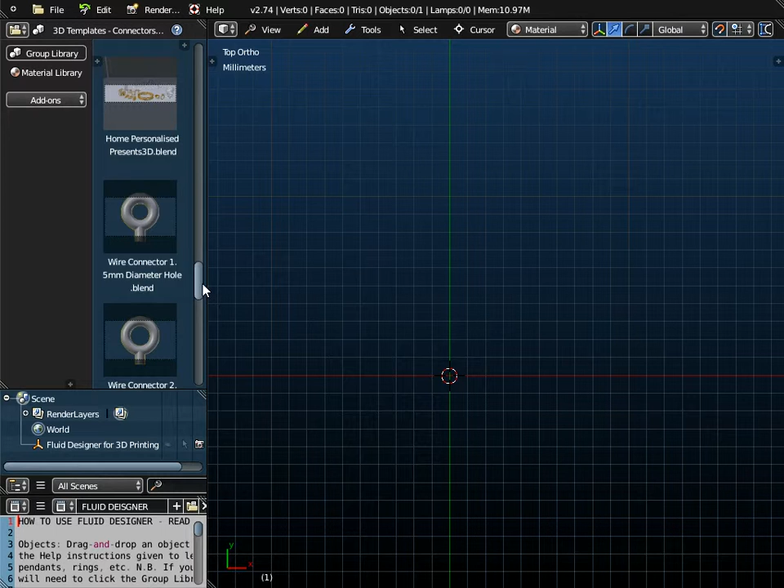We're going to use a number of objects. First object we're going to use is in 3D templates connectors. We're going to use this wire connector with a 1.5mm diameter hole, that's for the fish hook to go through.

I'm going to use a Harrington font. In this case, I'm going to use Harrington font letter A, so that's in the alphabet Harrington fonts folder. I'm just clicking group library there to refresh this file list.

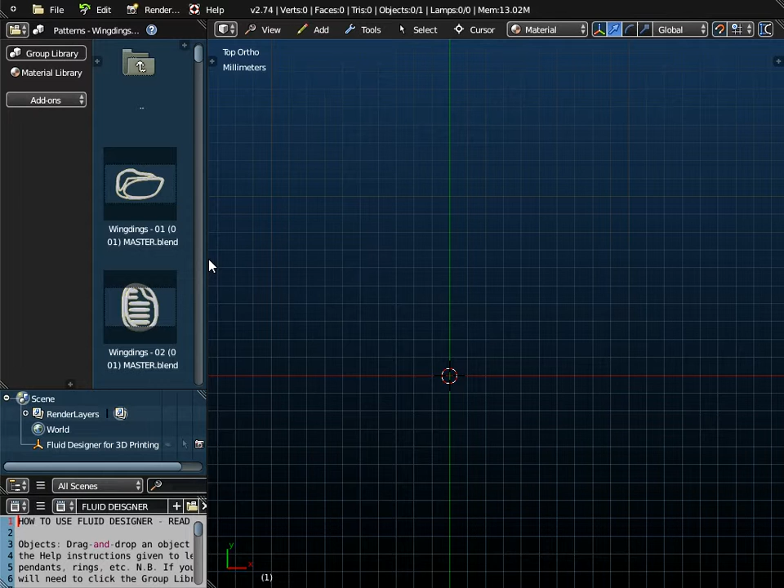Now, there are some Wingdings patterns 1 and 2, as per the special symbols that appear on your keyboard in Windows, and I'm going to use Wingdings 08, this mouse. But as you can see there are lots of other Wingdings patterns available as well, and they all work in the same way.

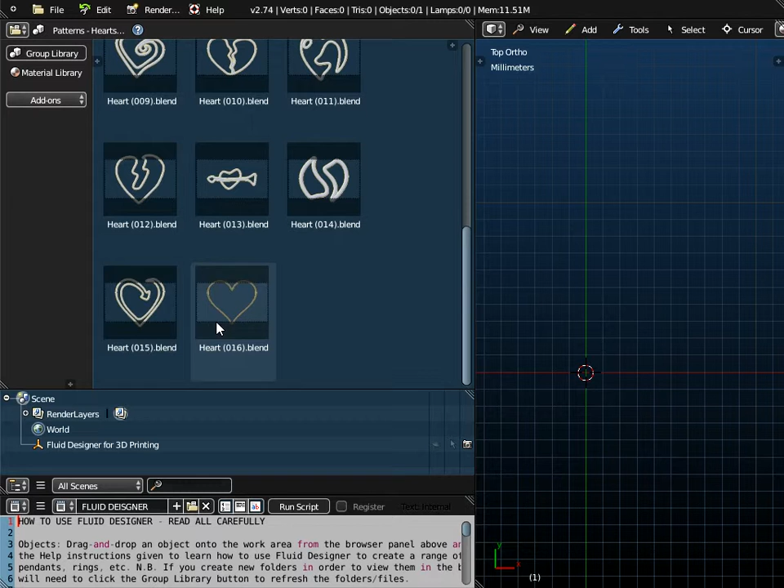And I'm going to add those various items to a heart pattern. As you can see in this folder here, the hearts patterns folder, there are a number of different hearts that I can use. I'm going to use heart 015, but I could of course use any of the others. So I'm just going to drag and drop that object onto the workspace.

I'll just switch on screencast keys, so key presses I make should be displayed down here, and just open up the properties panel here. The thickness of this object at the moment is 1mm by 2mm deep.

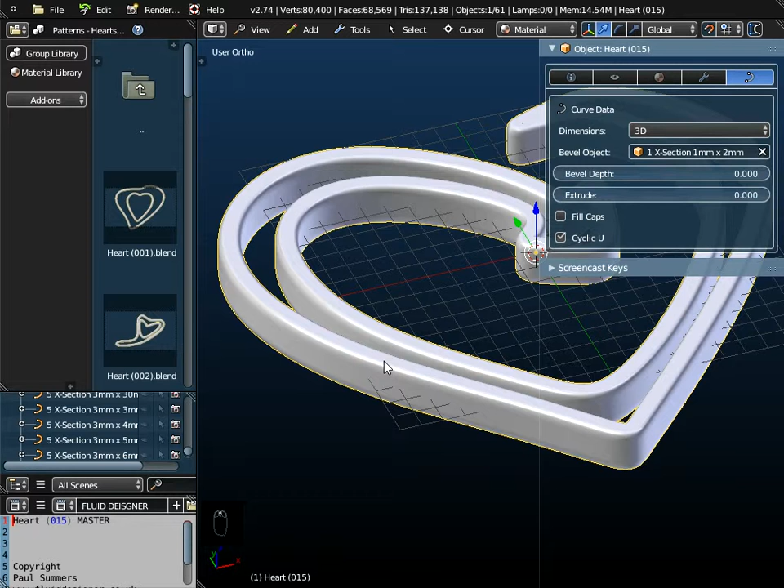Now this is a parametric smart object, so we could make it deeper, but that's not a good idea if you're making earrings. I'm going to set it down to 1mm by 1mm deep. That will reduce the weight and enable us to make an earring.

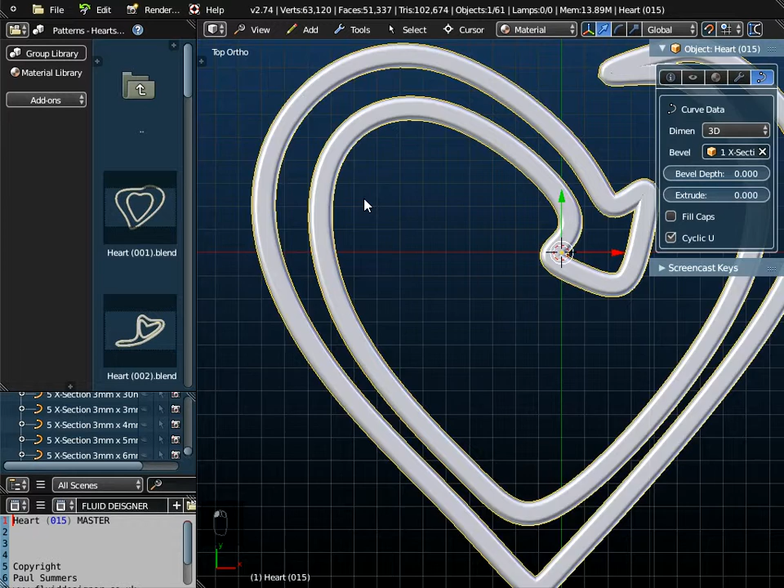So if I go to view and top view now, I'm going to first of all add on my connector, so that's this 1.5mm diameter hole wire connector here from 3D templates connectors.

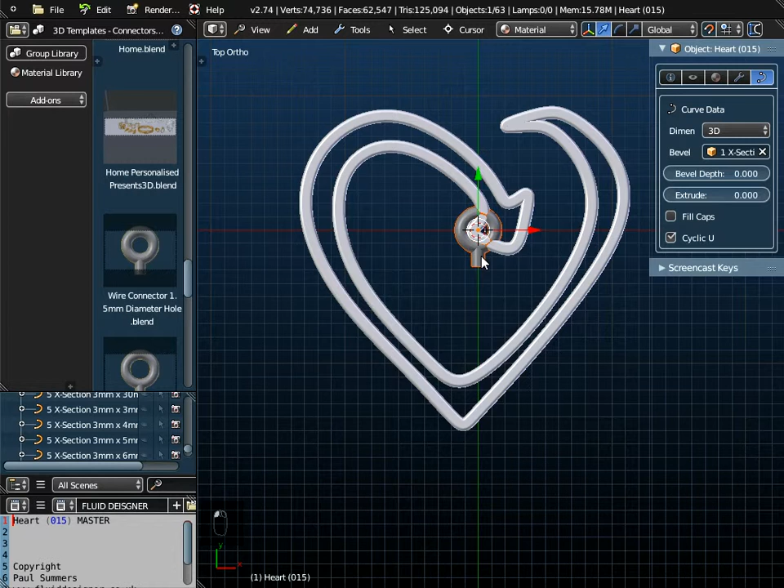So what I do is I go to file and append, just go up through the menu system until you get to groups, and then we look for the folder 3D templates connectors. I want a wire connector with a 1.5mm diameter hole, and I just append that object from the library and click on it to make sure it's selected. I'm just going to leave it there for the moment because I've got some other objects to place in here.

So I'll just click group library again to refresh this folder list. I want to use a Harrington font here. I'm going to use lowercase letter A, so I just go to file and append. Again, just go up through the menu system until you get to the groups folder. I'm now looking for patterns, alphabet, Harrington font, and I want lowercase letter A, and we always append the object. So it's the Harrington font A object, and we append that from the library.

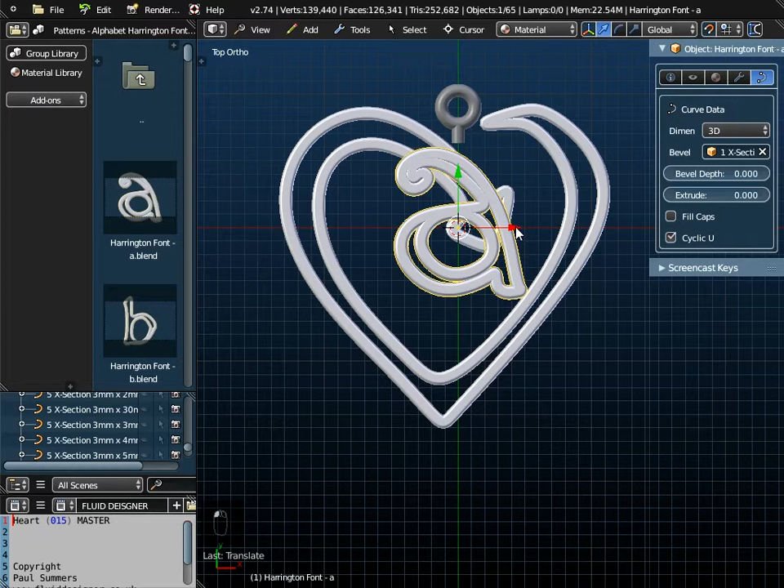Now I need to position this in a suitable place, and you can obviously, as you can see, move it around wherever you want. I'm just going to leave it there for a second.

And the last thing that I want to append is from the Wingdings folder, and as I say, I'm going to add this computer mouse. So I need to know the name of it. It's Wingdings 08 is what I'm looking for.

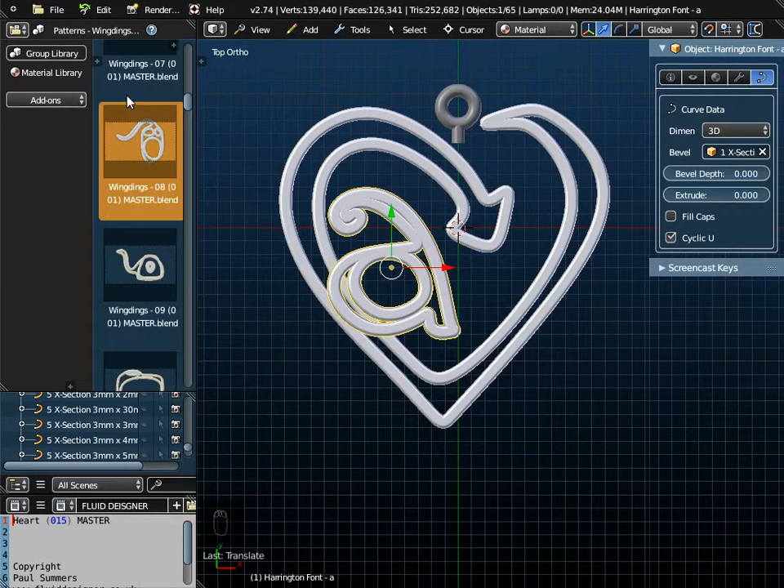And so I go to File and Append again. Just go up through the menu system until you get to Groups. Now there's two Wingdings folders. We want Wingdings on its own, not Wingdings 2. And I want Wingdings 08, as I say, these are keyboard presses you can make in Microsoft Windows. So I just append that object from the library, and you can see there it is, I've got the mouse.

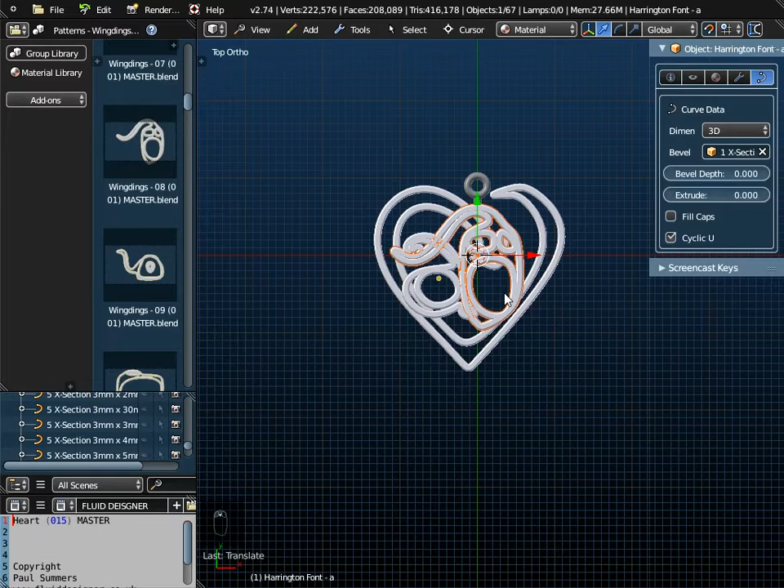Now when I click on it, you can see that this object's quite big at the moment. So one of the things I want to do is scale it down in size. If I press S on the keyboard, I can scale that down.

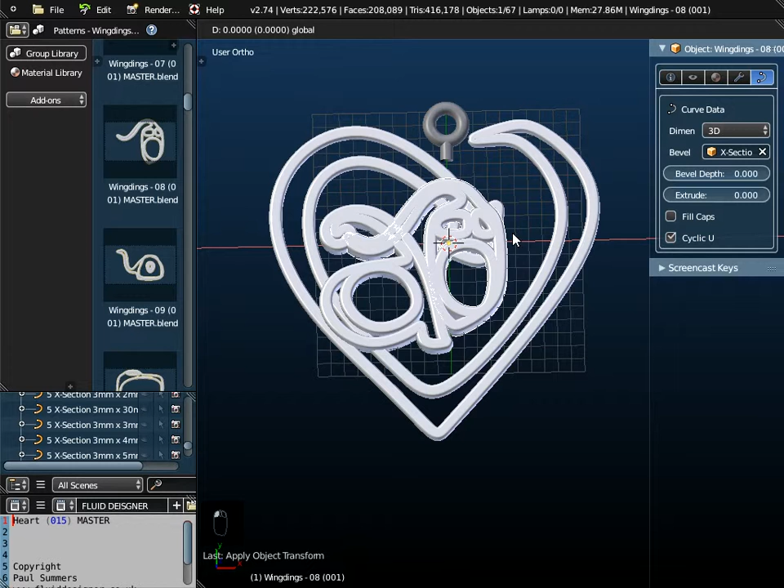Now when you do scale in Fluid Designer, because these are smart objects, you do need to apply the scale. You need to do Control A and apply the scale, and notice the thickness will be reapplied as you do that. So I'm just going to move that across to there, and where you position this is entirely up to you. I could scale the letter A down, but I'm not in this instance, I'm going to leave it.

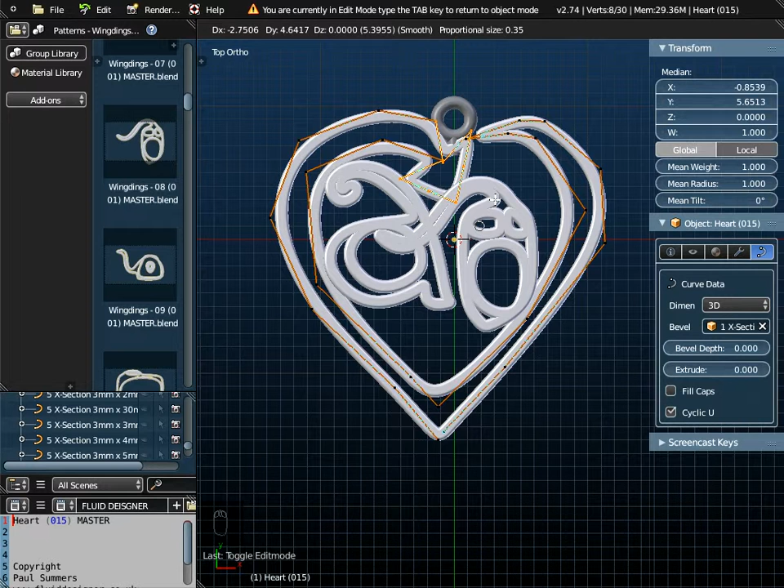What I am going to do is move the arrowhead of this heart shape, and I do that by selecting the heart, pressing the tab key to go into edit mode, and using circle select, scrolling out with the center mouse button, and highlighting those control points at the end of the arrowhead. Press escape to come out of that, and I'm going to switch off snap because this will give me better control, press G on the keyboard to grab that, and reposition the arrowhead there. It's entirely up to you where you decide to leave it.

I can then come out of edit mode. Now what I want to do is zoom in and reposition this. If I zoom in really closely, the grid will change, and if I switch on wireframe, I can see where the bottom of that is, and it's in the middle now. That's alright.

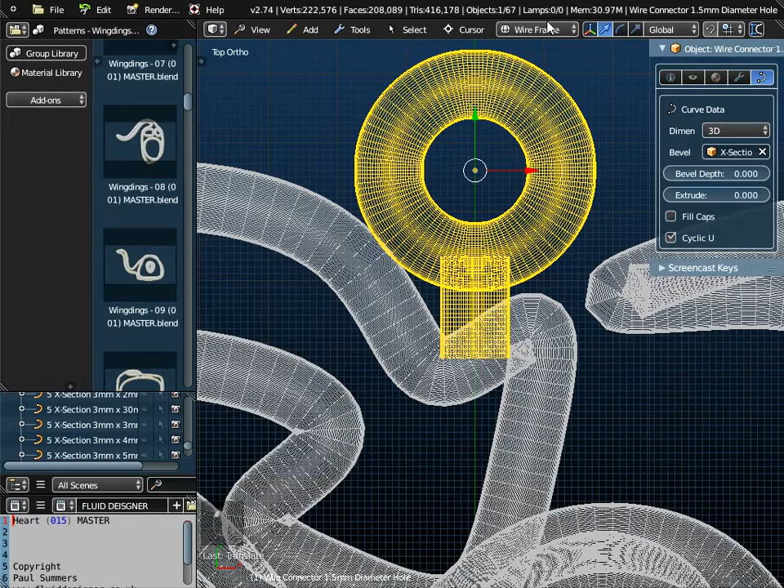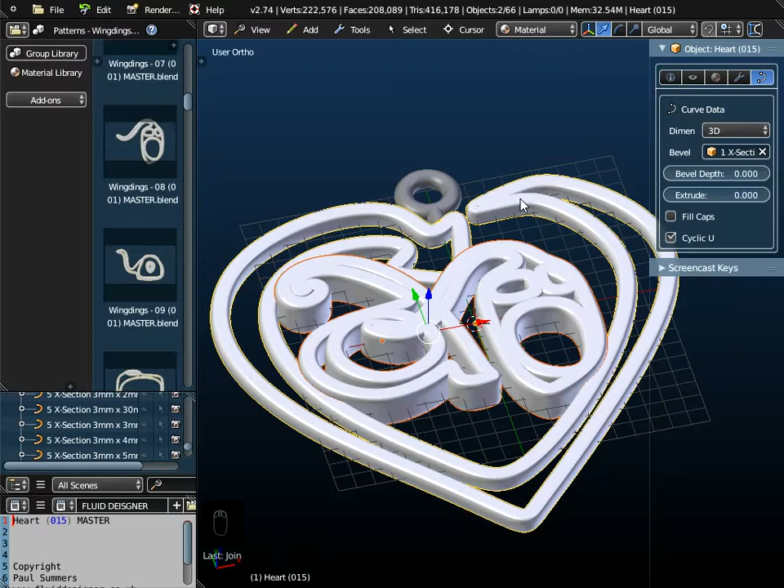So what I want to do now is join all these objects together. If I highlight the computer mouse and highlight the letter A, I can join those together. If I now hold down the shift key and highlight the heart shape, remember the heart shape's got a different thickness, when I go to Tools, Object Tools and Join, notice the letter A and the heart and the mouse take on the same cross section, that's 1 by 1, as the heart, and that's important.

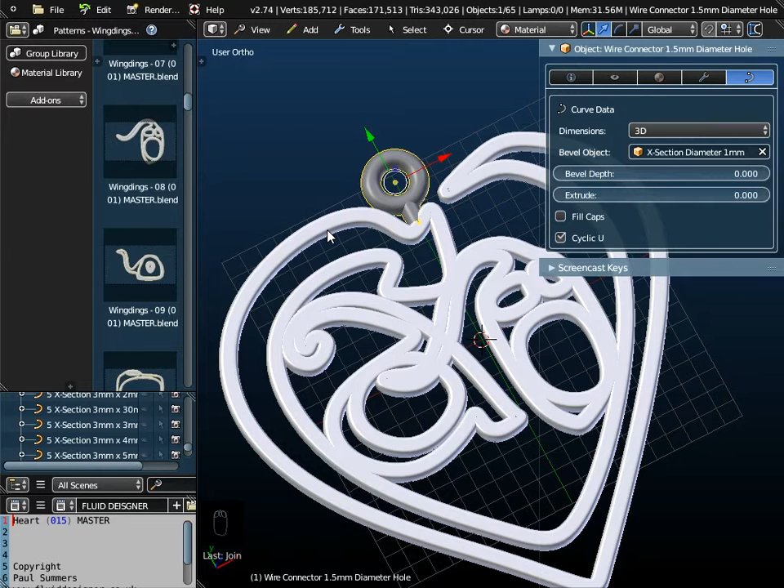That's because we want to keep the weight down. And if I highlight the connector now and then hold the shift key down and highlight the heart and go to Tools, Object Tools, Join, notice that the connector is also now 1 millimeter by 1 millimeter. It takes on the same properties as the heart. That's essentially all you need to do in Fluid Designer.

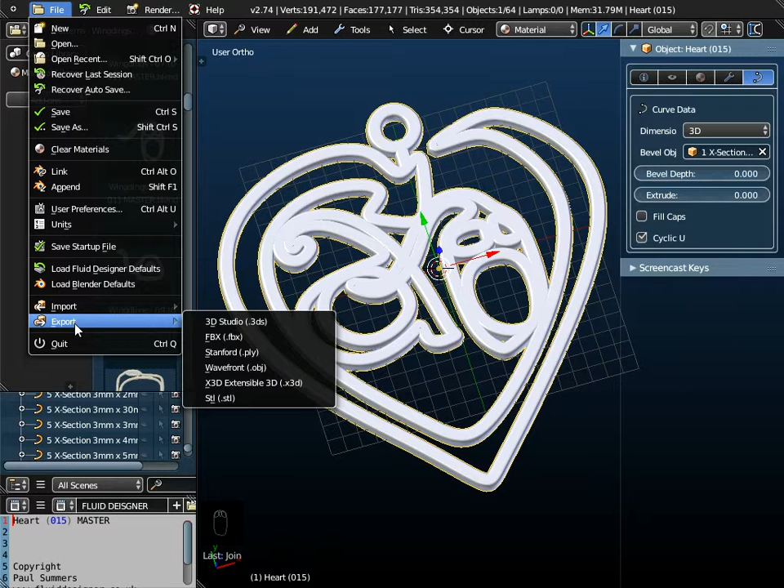Join the objects together. And what I would do now is go to File and export it. I tend to use the Wavefront OBJ format rather than STL, and save it to the desktop. I save this with the name Personalised Mouse Heart Earring.

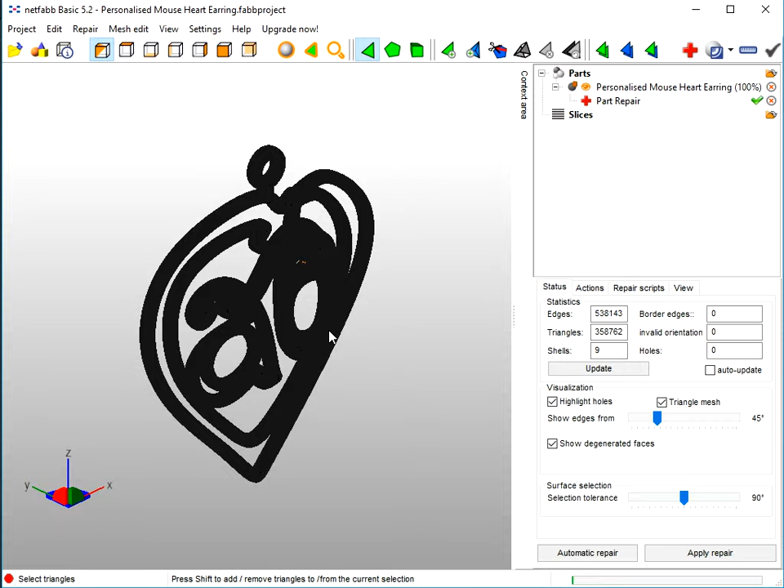And what you then do is go to Netfabb Basic and just run the repair procedure there. I have obviously already done this, but you just click Automatic Repair and Execute, and apply the repair and remove the old parts, and there's your file for sending to Shapeways or for 3D printing, and you then export it as a Wavefront OBJ format as a personalised mouse heart earring.

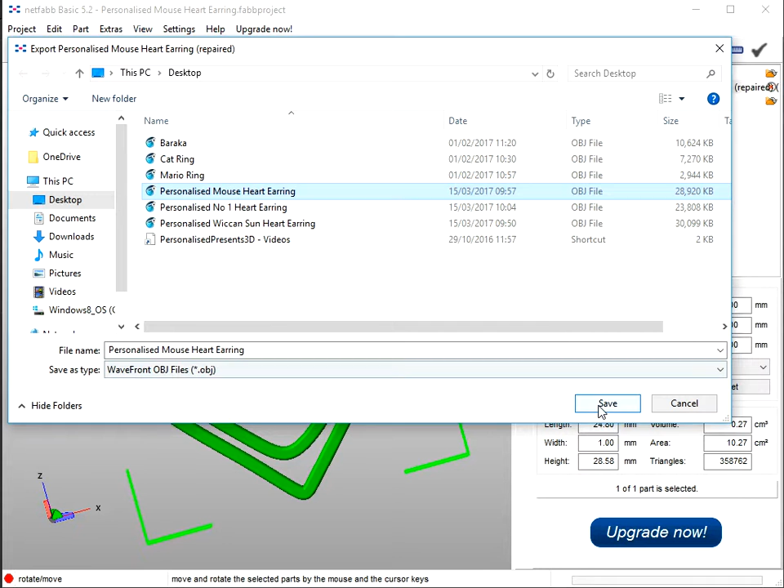And over here we can see what the volume of this is, and the volume is 0.27 centimeters cubed. Now if I move the decimal point one place to the right, it becomes 2.7, and that roughly equates to 2.7 grams if we make this in silver. So the volume gives you an indication of the weight of this object.

If you wanted to reduce that volume, you could scale these objects down a little bit further. And that's it. If you want us to actually create one for you and personalise it, you can do through Shapeways or through our website at fluiddesigner.co.uk. Thank you.